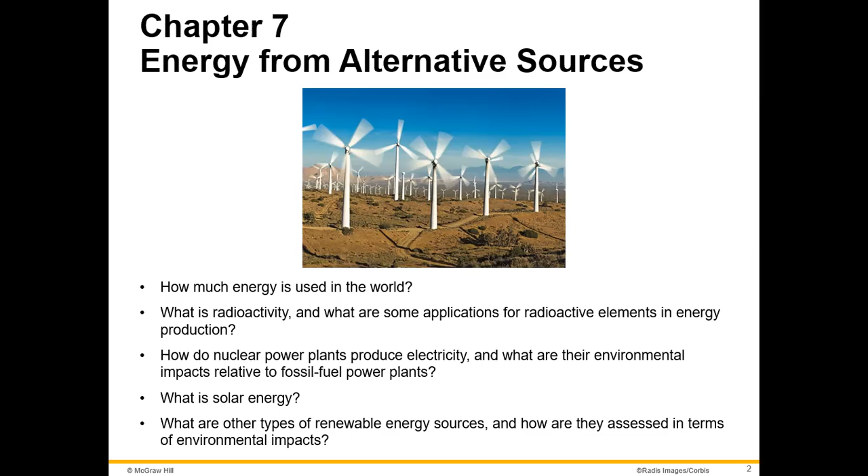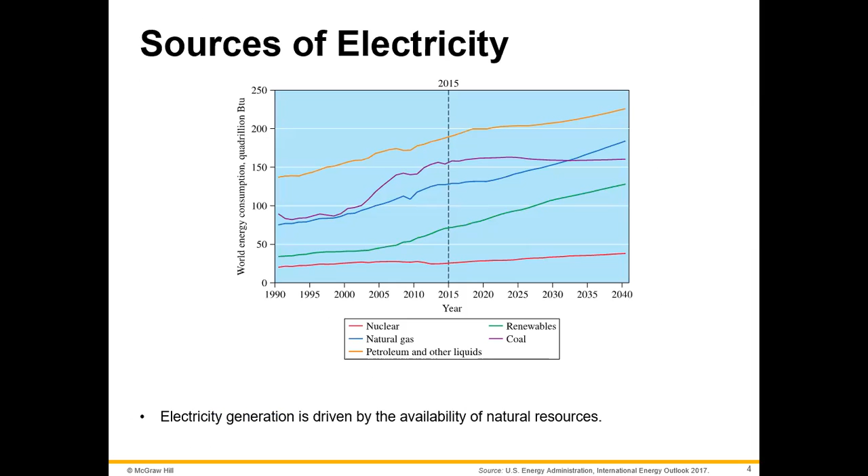Sources of electricity are displayed here in this chart, just a rough estimate of where we're getting most of the energy. I'll let you look at that on your own.

A turbine is just like a big engine. If you ever look at a plane engine, it's got all those blades that spin—that's kind of what a turbine looks like.

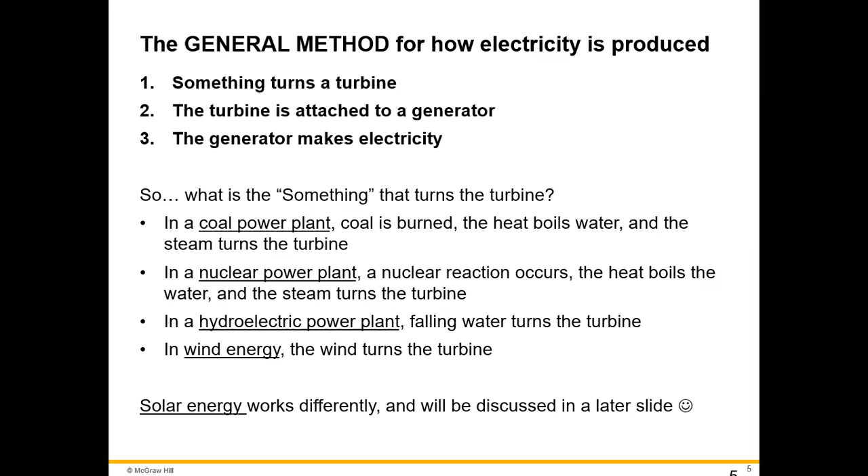As mentioned in the last lecture from Chapter 6, coal-fired power plants are not considered alternative energy, but I've included them in the Chapter 7 notes just as a comparison, because they all follow the exact same general format. So if you understand how one works, you're basically going to understand them all.

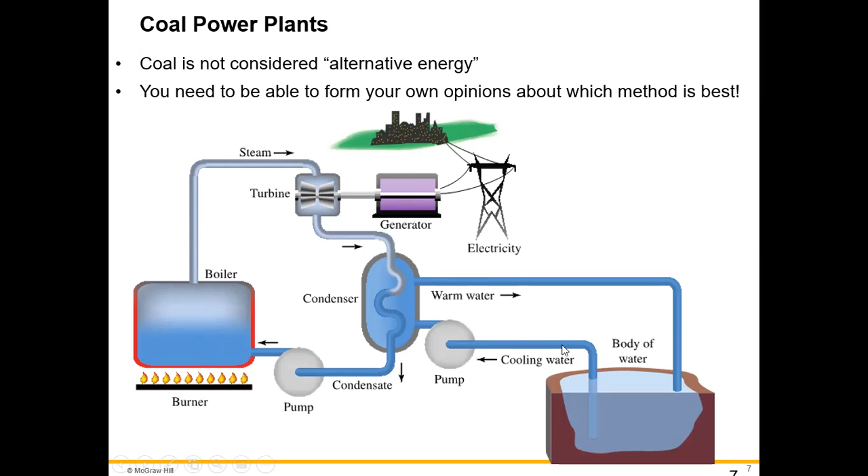In a coal-fired power plant, you've got your coal being burned. The heat heats the water into steam, which turns the turbine, and the turbine is attached to your generator, which makes your electricity. Then that steam goes back down and gets condensed and goes back into your boiler, or it goes out into a cooling pond and then back in, depending on its temperature.

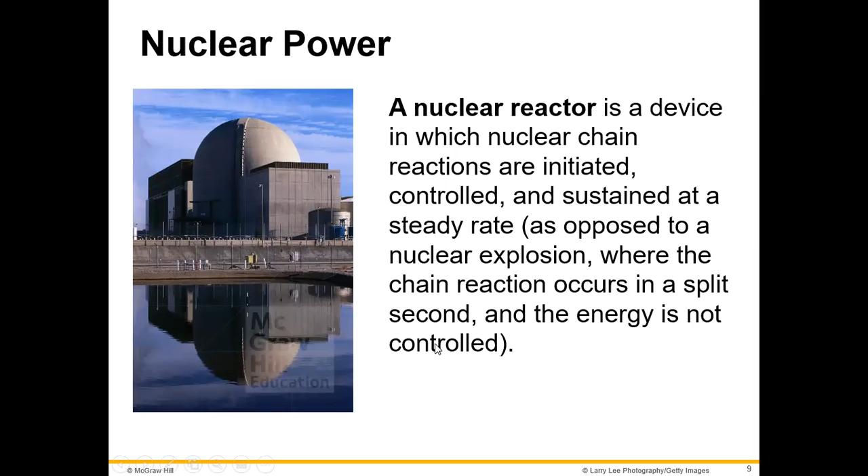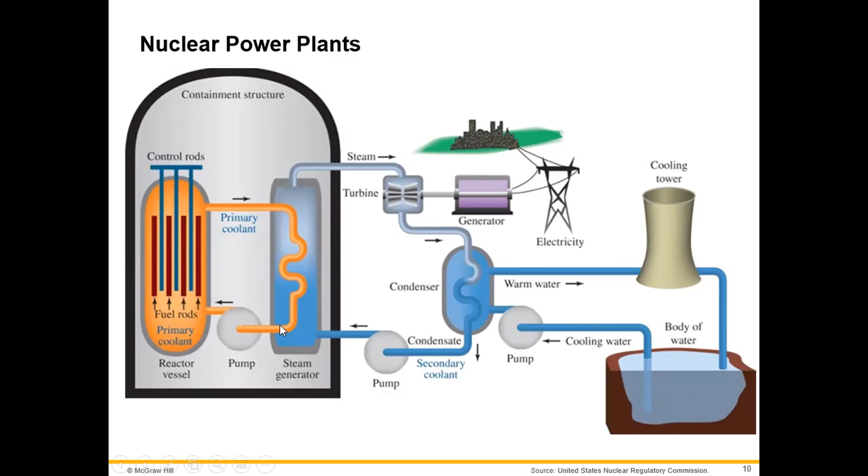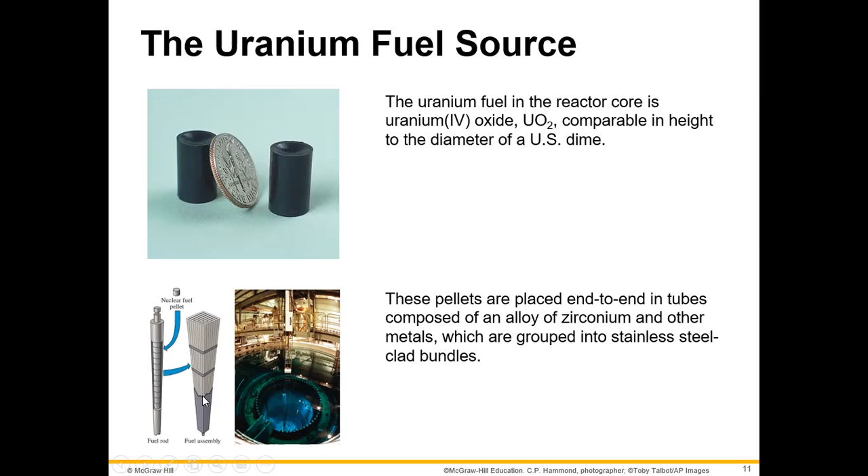So if you're talking about a nuclear power plant, you're using a uranium fuel source, and they're about the size of a dime. And then they are put into rods like this, big long rods, and they are in a bundle, and then they are put down in here, and it's controlled that way.

So let's talk a little bit about radioactivity, just in general, while we're talking about nuclear. What are some sources of radioactivity in your life? Naturally occurring is the answer to the majority of our question. Radon that exists in our environment, and then other natural sources other than radon, that accounts for the vast majority.

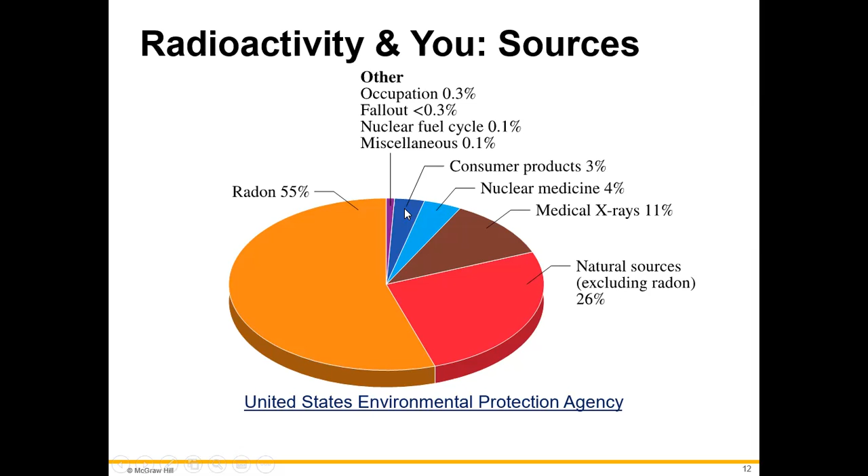Then where else can you be exposed to radioactivity? Well, if you go get an X-ray, if you're doing some sort of nuclear medicine, and then consumer products, and then this tiny little percent is everything else. And you have natural radiation in your body just from radioisotopes. That's just part of our existence as creatures.

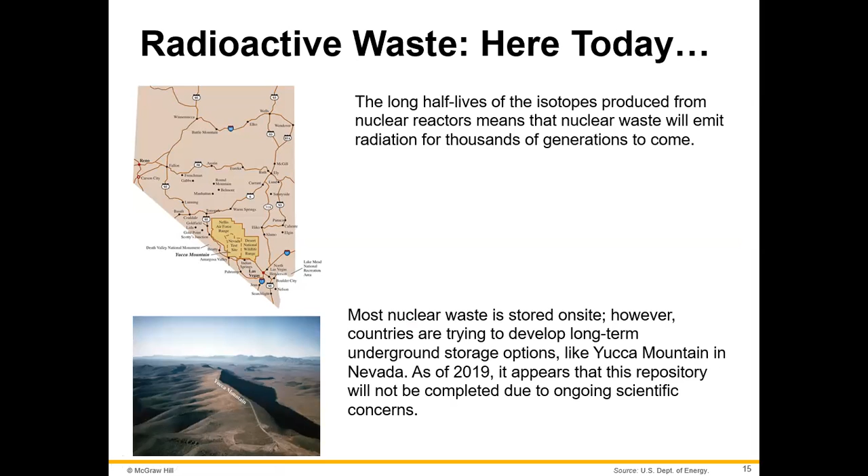But the thing about radiation, the thing about radioactive waste, is that it's around for thousands of years, because some of these take thousands of years to decay. And so they are dangerous and hazardous to have around for a long time. That's the main downside. If you were going to list the pros and cons, that's one of the big cons for radiation, because it takes a long time to go away.

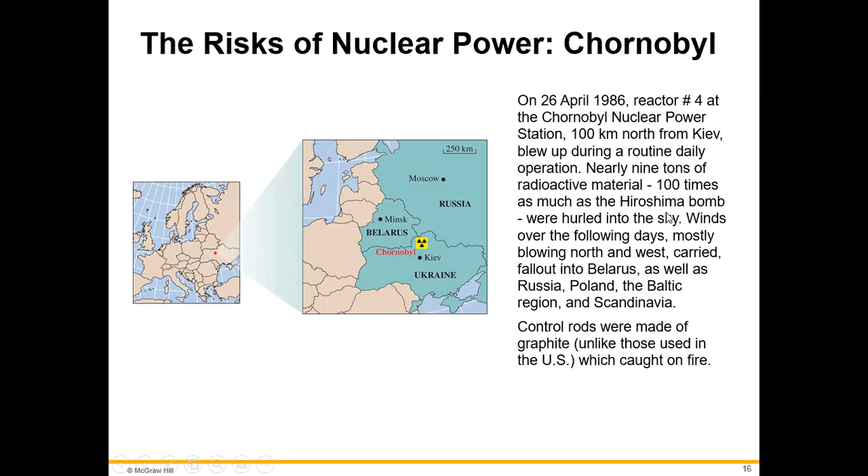And so many of you have heard of the Chernobyl disaster in 1986. It occurred in Ukraine, and it was a complete disaster. The control rods failed, and the safety measures failed, and 9 tons of radioactive material — that's 100 times more than a bomb — just went up, and it carried it all over Europe, and it was a really great catastrophe, very bad.

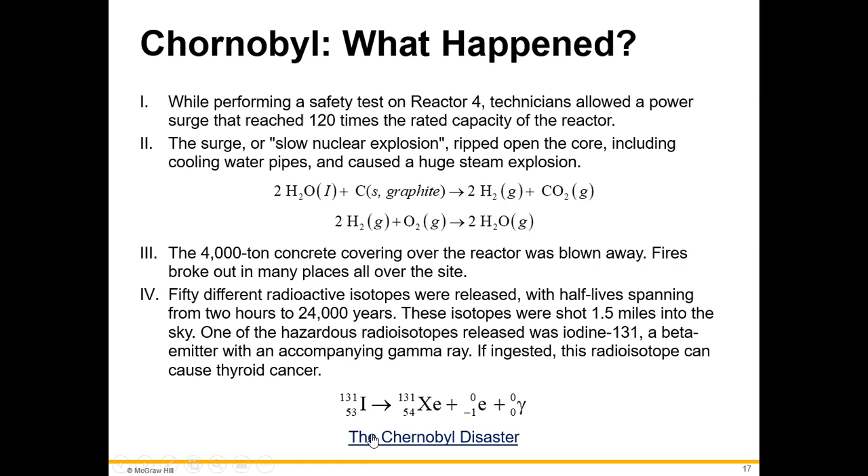And so the consequences of that: lots and lots of injuries and deaths and people being evacuated. And then unfortunately, because of the fact that it was launched so high, it went all over — 250 million people exposed to this radiation. And then the estimates of future cancers from that range anywhere from 7,500 to 1 million. That's a huge range, and it's obviously going to be difficult to measure that over the years.

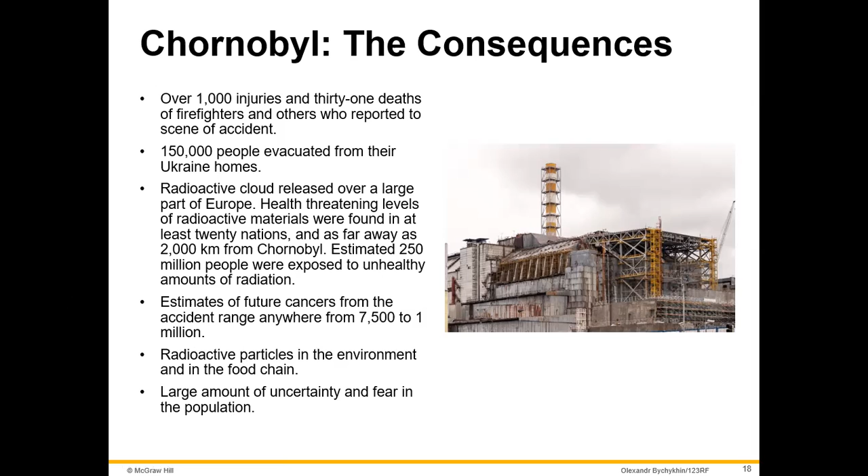But as a result, there's radiation in the environment, and a lot of people are scared of radiation now because of that, and rightfully so. I mean, that's something scary. It also caused people not to trust their government or worry that things were going to be covered up, and people are just generally uneasy about the idea of nuclear power now.

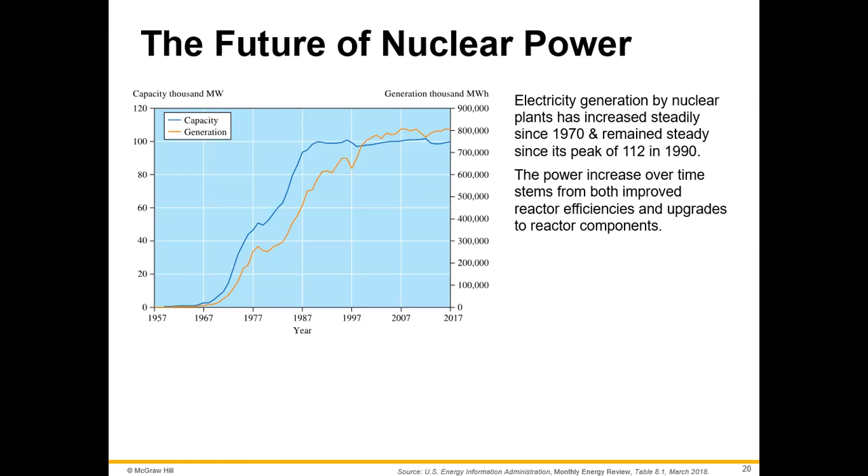So what's the future? Well, it's definitely got to include a lot of safety measures. It's got to include gaining the public trust. And it's got to make sure that we have everything in place to keep everybody safe.

We have regulations here in the United States, and nuclear plants are supposed to be inspected, making sure there's always a backup so that we don't have meltdowns. You should have good, safe science no matter what kind of science you're doing, even if you're just doing an experiment in your kitchen with your goggles on. You always should have safe science.

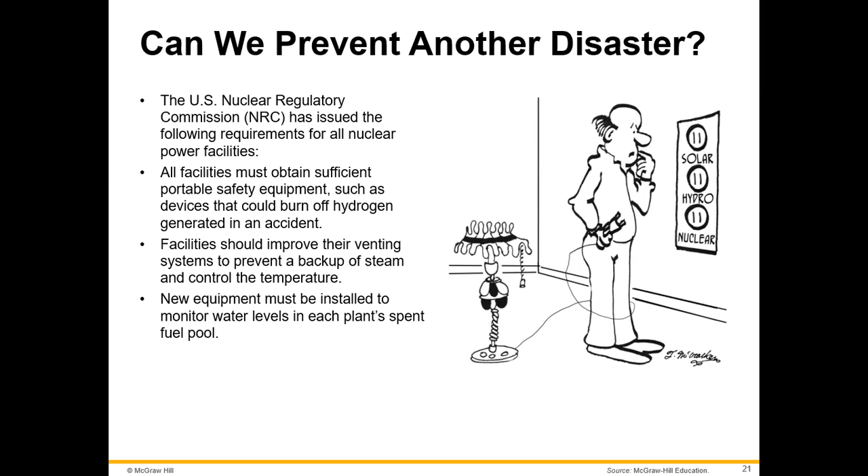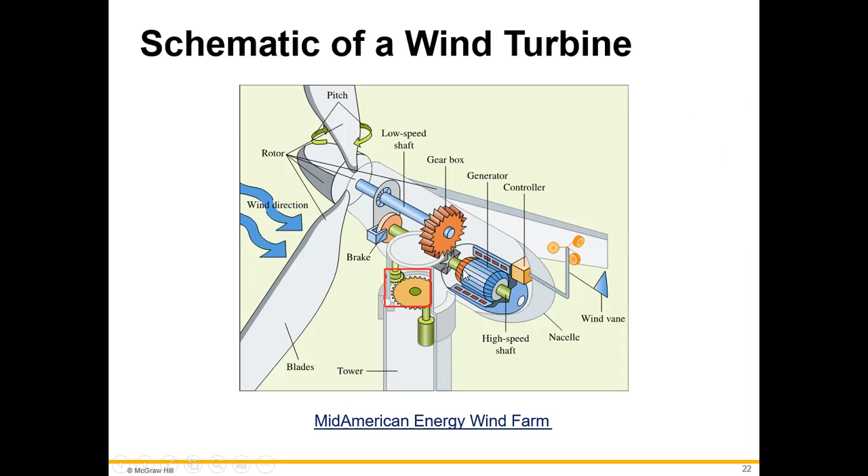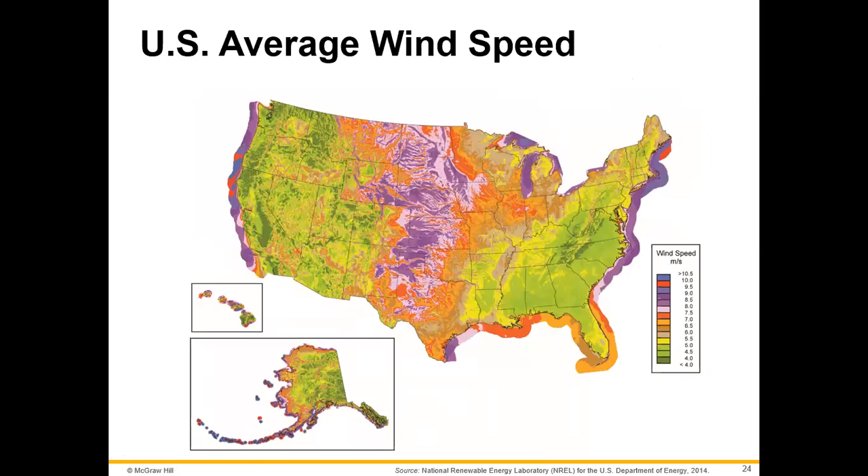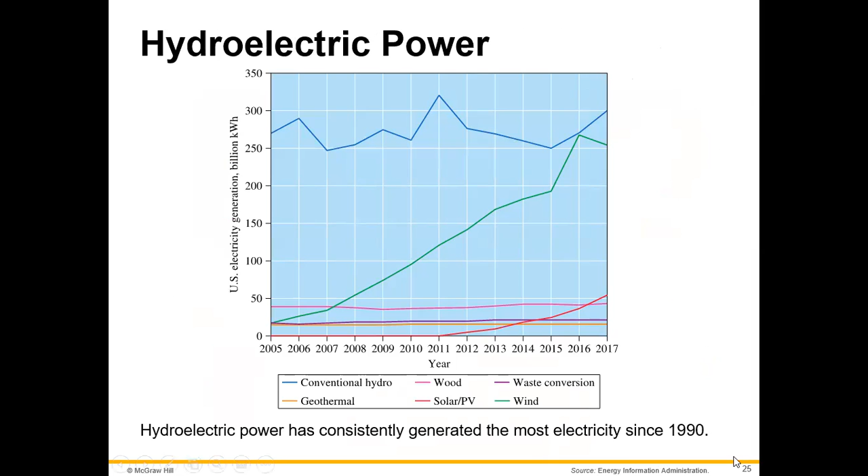Let's move on to hydroelectric power. It has been increasing dramatically since the 40s and 50s, and it's created a lot of electricity since 1990. That's the line here at the top if we're looking at the renewable sources of energy.

Some of the cons of hydroelectric would be you obviously have to build this gigantic dam. You have to be pretty invasive in the environment - the fishies and the frogs and the turtles and all the other creatures that live in the river are going to be affected by this. It requires a great amount of flooding too. You have to flood large amounts of land in order to make the reservoir, and there's also risk of flooding in other parts of the river as a result.

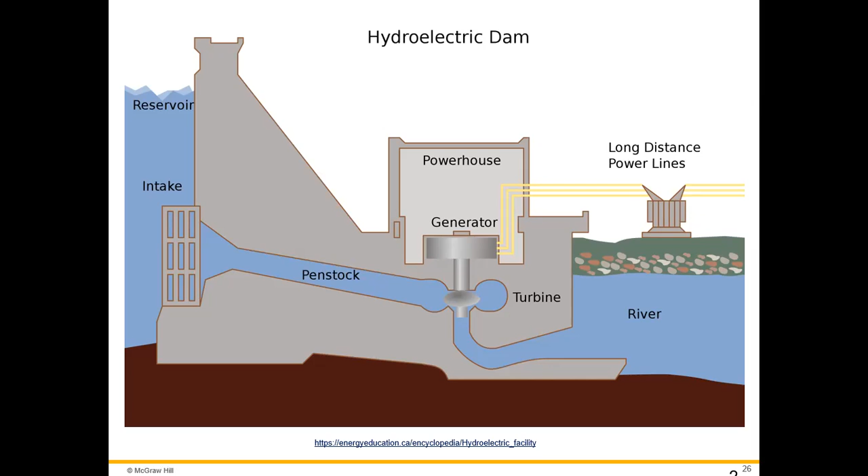So again, anytime we're talking about these sources of energy, you always have to consider the pros and the cons. The last one we have is solar power, and it works a little bit differently because there is no turbine, there is no generator. That's the only one that is turbine-free and generator-free. It works a whole different ball of wax.

So what should you know for a quiz or a test with regard to these things? You need to know the general method for electricity production, be able to list the pros and cons for each one, and be able to explain what's turning the turbine or the generator - is it moving water, moving air, heated steam? Or in the case of solar power, how is it that that's being generated? Your electricity comes from the fact that as these electrons get excited, they break loose of the electron matrix that they're living in. And then you need to be able to make an argument for which method is your favorite and defend that.